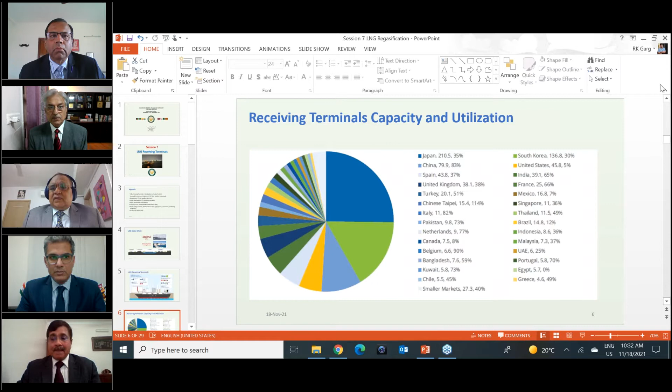Just a minute. I'm not able to see my full screen. Can someone help me? Because I'm still having the cam. There is a cup-shaped icon. If you can press that. Oh yeah, that. Thank you. Thank you very much.

Today's presentation is basically on LNG terminal, and this is very, very important because we SAARC member countries are already importing LNG, and some are planning to import in near future or use LNG in their energy basket. So this session is going to be based on few things. One is that, as Mr. Ehsan has mentioned, it will be considering the land-based terminal, floating storage unit, comparison of these, which one is better, which one is useful, which has good techno-economics, or which one is best in what situation.

And we will also discuss the tolling arrangement or merchant arrangement of these LNG terminals. We will also take into account what are the major factors to be considered before planning for putting an LNG terminal. And we will also discuss the major terms, if you are going for a tolling arrangement, what kind of terms and conditions generally are followed by the regasifier or a terminal owner. And at the end, I will finish with some slides on small scale LNG, but will not take much time on that because there is going to be a presentation by Dr. Nawaz Ahmad. Thank you very much.

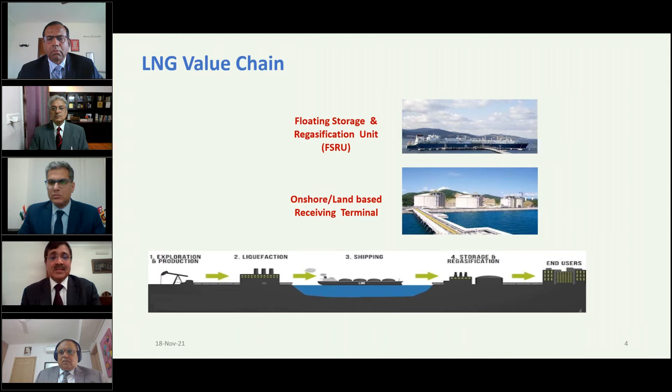This slide is important because all business activity of LNG supply, regasification, and end users is a very important point. The reason is that the entire money which comes from the end users flows back up the chain. So the operation, construction, and utilization of this terminal is very important for every party involved in this chain.

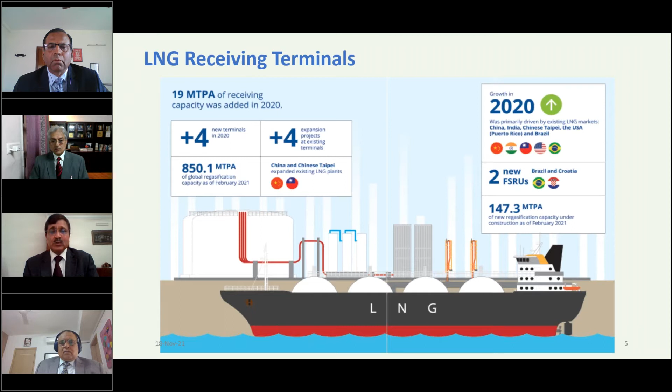You have seen this slide earlier. Currently, globally we have 850 million tons of LNG regas capacity, and around 150 million tons is already under construction. So total we will be having 1,000 million tons of capacity worldwide, and the users and terminal countries are increasing. We heard about more than 42 countries where LNG terminals are already in place.

One important thing to understand, this question was raised earlier also, is what is the optimum utilization rate of a regas terminal. If you see this slide, especially those countries who have been operating LNG terminals for a long time, like Japan, we have 210 million tons of capacity but utilization is only 35%, and South Korea 136 million tons utilizing 30%.

The reason probably is that they have seasonal requirements, especially in winter, their demand increases and they need more gas, plus they need more flexibility in their operation. That's why the utilization of 35% or 30% is there in the terminals in Japan and Korea.

Another important feature: in the United States, out of this total 850 million tons, around 50 million tons of capacity is in the US, which is not under use, only 5% is used. The reason, mentioned clearly yesterday, is that they have now gone to liquefaction instead of regasification, because there is no requirement for regasification in the United States.

Other countries, especially new countries who have come into this LNG regas business, like China, 80 million tons, 83% utilization. India, 39-40 million ton capacity, 65% utilization. Bangladesh is 59%, and similarly in Pakistan it's 73%.

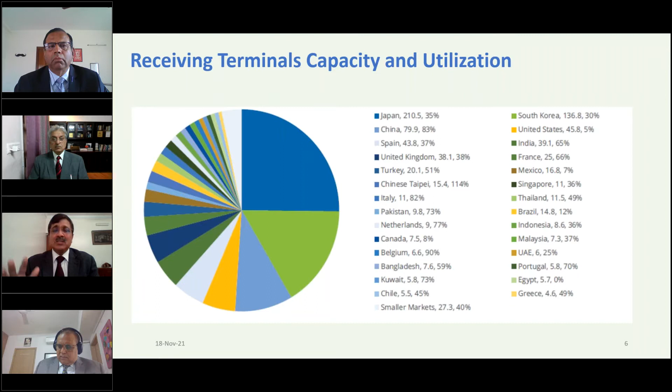The amount required for building a regas terminal is comparatively very low compared to liquefaction facilities. For liquefaction facilities and regas terminals, say if there is $10 billion of investment in a liquefaction facility, the investment you will see here is much lower. But the activities of the regas terminal are still very important.

So before building any regas terminal for any organization or country, some important factors have to be kept in view. First, one has to do a market assessment of the demand for gas and the possibility of its utilization. Along with that assessment, it's very important to look for anchor customers who would be using this LNG terminal. Anchor meaning, is there any power plant?

Is there any fertilizer plant, or maybe refinery, petrochemical complex, or any other major demand center? Because if we have around 40, 50, 60% utilization which is very close, or they are ready to use the gas from the terminal, then life becomes easy. So in any case, a full assessment of the demand is to be made, and then think of going for a regas terminal.

Another important factor is whether I am going to have an onshore land-based terminal or a floating system. Floating means a floating storage and regasification unit, on a floating ship. But there's another system nowadays being seen - an FSU, which is a floating storage unit, with regasification done on land. So all these technologies are quite prevalent now.

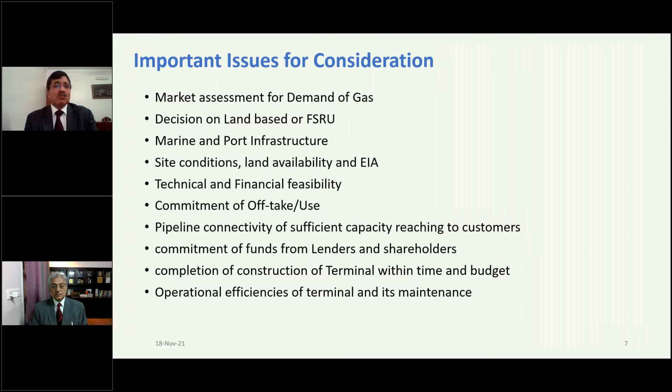This has to continue - training of personnel has to continue along with the construction of the terminal, and regularly the terminal needs to be maintained properly so there are no hiccups during operation. So these are the important factors to be kept in view while deciding to go ahead with construction of an LNG terminal.

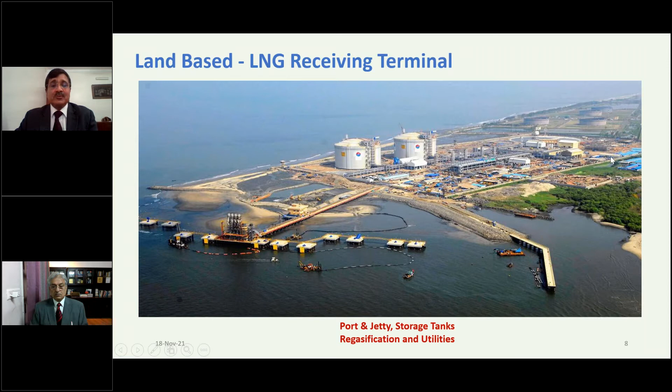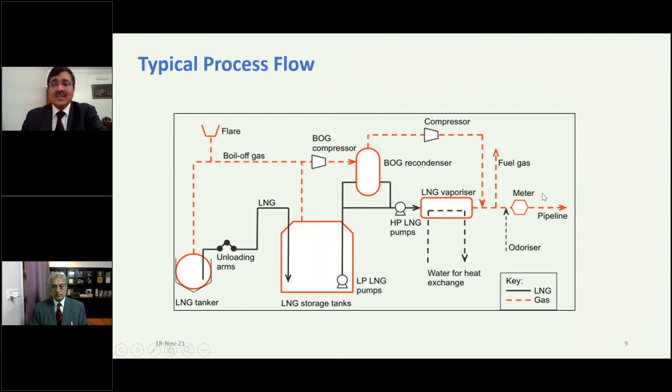Another is FSRU technology, where currently 43 FSRUs at the end of 2020 are in place, having a storage capacity of 6.4 million cubic meters, and FSRUs are increasing day by day, especially in countries where the requirement is immediate and they can't wait more. This is becoming a better and better option nowadays, especially in Bangladesh and Pakistan, where we have FSRU terminals in place.

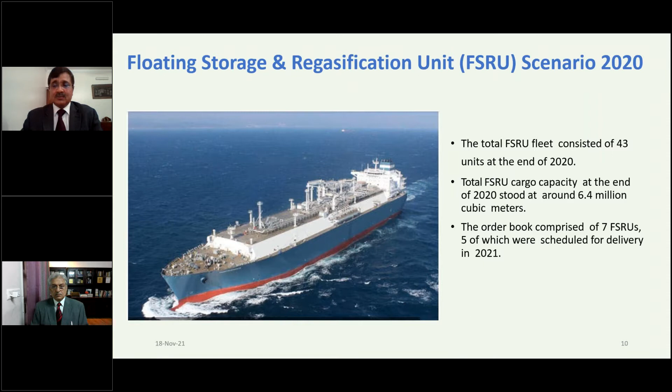Though in India, so far, all of the operating terminals are land-based, there are projects, and one recently commissioned FSRU project is also there as of now. So we'll discuss in detail what the FSRU components are. If you see one typical FSRU connected to the shore, the same kind of facility is required for the ship to be in place, but this is an FSRU. This is a floating unit, a floating FSRU unit.

You will see the regasification plant is stationed on the FSRU. The storage tank is basically a ship. The unloading hose is there. When a ship comes, it is connected to the ship and LNG is unloaded. Virtually it is a ship to ship transfer happening, and then from there the gas is exported to the consumer. So actually there is no activity on the land except the pipeline connectivity, plus the onshore marine side facilities are created.

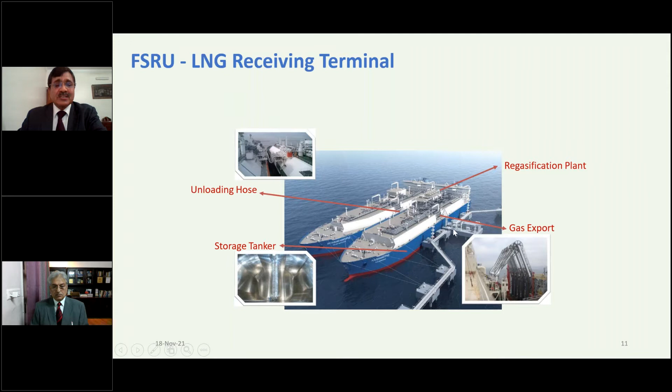There are projects where the FSRU is not onshore, but somewhere in the sea, maybe 10 kilometers, 15 kilometers away. And there are technologies available where the FSRU is stationed in the sea, and an underground natural gas pipeline transmits the gas to the land. Both technologies are present, but it depends upon the marine condition, whether it is feasible to put the FSRU there or onshore. So both are relevant nowadays.

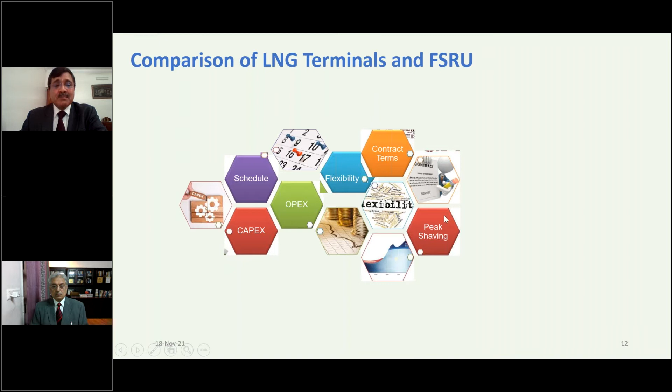A few things have to be considered while going for an FSRU or a land-based terminal: what is the schedule of when I need CAPEX, how much CAPEX is required, whether I need a low CAPEX activity, how much OPEX there would be in case of an FSRU and a land-based terminal, what flexibility I need, whether it is a peak shaving terminal. These important factors we will discuss.

This is a slide I have taken from the web. It is from a study done by one of the companies, comparing a 3 million ton land-based facility and an FSRU. For the land-based, the indicative cost for a jetty including pipeline comes to around $60 million. It was considered the same, because a ship has to take berth in both.

An unloading line here is required for an LNG terminal. For a tank, it is around 85 million. They have considered only one tank for a 3 million ton facility. If it is more, then you probably need 2 tanks of that capacity.

In FSRU, because the tank is on the ship, there is no investment required. FSRU vessel cost has been considered around $250 million; it is a new FSRU. The terminal owner has an option: instead of putting in that cost, they can hire the FSRU, and the FSRU owner can provide the services for a fee. All other process equipment, as I mentioned, is required to be placed on the LNG terminal.

For onshore infrastructure, a minimum expenditure considered for that facility or site is around 30 million, and other charges are like this. So comparatively, it was indicated that around $560 million versus $360 million is the capex required for a 3 million ton facility, land-based versus FSRU. The numbers could be different, but one thing is sure: the cost of an FSRU is lower compared to a land-based LNG terminal. We will see which is good and which is not.

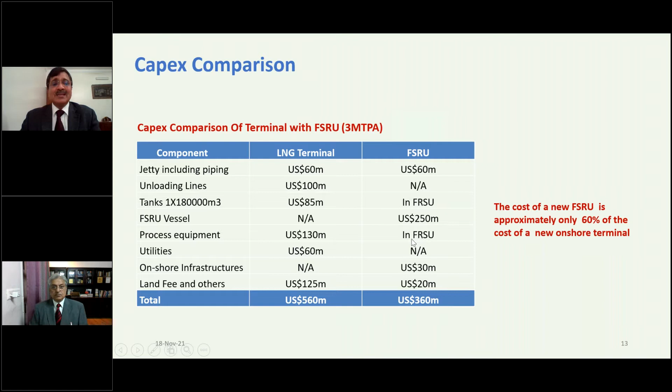Time taken for an FSRU and a land-based terminal is an important factor. A land-based terminal takes longer, around 36 months after award of an EPC contract, because the LNG tank construction itself takes 36 months, and other activities can be done alongside. So 36 to 40 months is required for an LNG terminal after the decision is taken and the award has happened.

An FSRU takes around 27 to 36 months, depending on whether you are getting the ship built or hiring, how many facilities need to be created on site, and what conditions need to be in place on the FSRU. So the time for the terminal to be ready is less in the case of an FSRU.

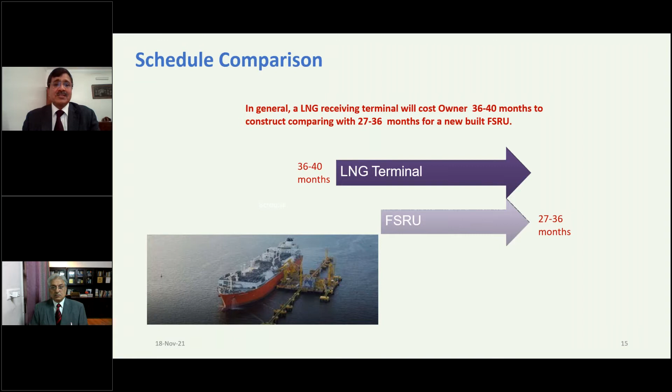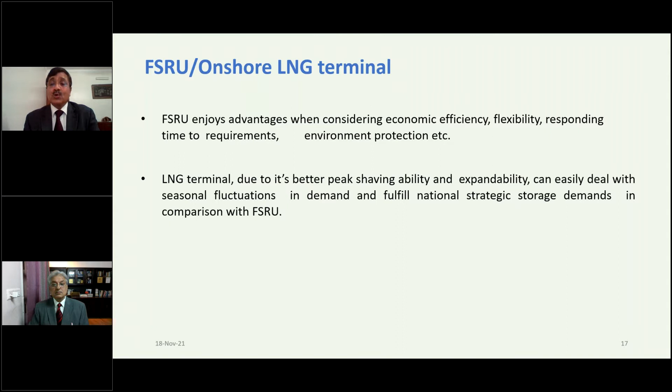So FSRU enjoys advantages considering economic efficiency, flexibility, response time to the requirement and environmental protection, whereas the land-based terminal, due to its better peak shaving ability and expandability, can easily deal with seasonal fluctuation in demand and fulfill national strategic storage demand in comparison to FSRU. So these are the basic differences between the two. Both are technologically working, but the decision has to be taken on which one is good for a particular site and the conditions prevailing at that time.

Another important thing one has to decide when building a regas terminal is whether it is going to be a project company building the LNG terminal that will own the gas and sell gas. It is a merchant structure, where the project company that owns the LNG regas facility directly enters into an agreement with the LNG supplier. They have the LNG SPA and the shipping arrangement, or shipping is done by the LNG supplier. So it is a direct agreement with the project company, who buys LNG and then sells gas to the gas off-taker, whether one off-taker or multiple off-takers or consumers. It depends upon the model which has been created.

So all the risk with respect to LNG volume, LNG price and related matters remains with the gas company, because they own the LNG and supply gas. Though this company would like to sign materially back-to-back agreements with the gas off-takers if they are aggregators, and try to insulate itself as far as possible from LNG price, LNG volume and foreign exchange. So this depends upon what kind of financial model is done.

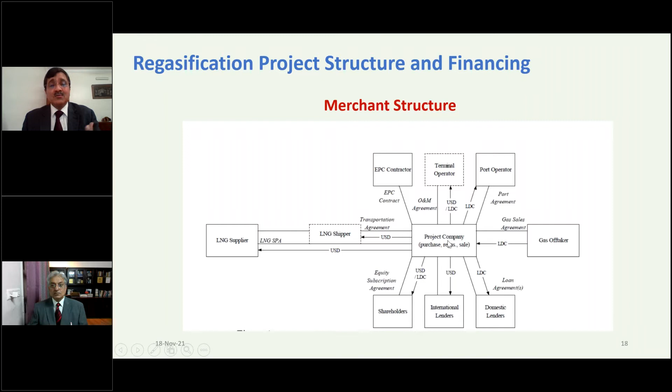Another model is a tolling structure. Under the tolling structure, the responsibility of buying LNG and taking gas basically remains in between. It may be a gas utility company, or it may be off-takers who would be users of the LNG facility. It could be one, or there can be multiple.

So they take a call with the LNG supplier and shipper to buy LNG and get it transported, and they're the gas off-taker then, who will off-take this gas from that LNG, this utility company or aggregators. And they will sign a tolling agreement with the project company who owns the terminal, and the rest of the other activity would be carried out with the terminal owner, and they get their financing done based on that. So construction and operating risk related to the terminal remains with them, whereas in the tolling structure, the LNG-related activity and supply-related foreign exchange remains with the other entity who takes this.

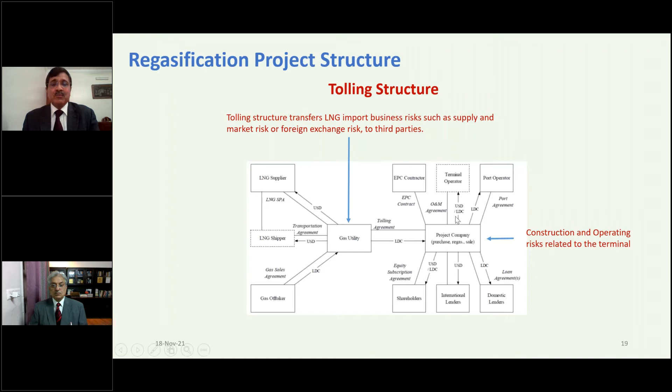Both structures are in place. So one can decide which model is good depending upon the risk appetite of that company, or the requirement of especially the off-takers. Or it could be a hybrid model, as I mentioned about Hazira, where both models are working right now together along with the terminal. So it has its own challenges, and another risk involved in that.

So in the terminal use agreement, especially in the tolling structure, the basic services provided by the toller are berthing of the LNG ship, unloading and receipt of LNG from the LNG vessel, and storing that inventory on their behalf in their terminal, because ownership of the inventory remains with the owner of the LNG, who is a utility or an off-taker or user of their facility. And they provide the pumping, regas and send-out facility. Basically, this is the major activity carried out by them, and transportation to the delivery point. Sometimes it is very close, sometimes far from the terminal, depending upon what kind of transportation facility is created for gas. Measurement and testing facility is provided, plus maintaining the inventory on their behalf and providing that information. These are the major activities for the tolling company to do on behalf of others.

So in the receipt of LNG, as mentioned, the title, custody and risk of loss: title always remains with the owner of that LNG. Custody is with the toller, and the risk of loss depends upon the agreement you have signed. If the risk of loss is with the tolling company, then they have to take care of the insurance, because the LNG inventory is in their custody, so the risk remains with them. Another activity is that when the LNG is unloaded, they will do the measurement at the terminal. They have all the equipment for it, because the payment to the LNG supplier in case of DES supply is based on the quality and measurement done at the terminal, and the terminal should have that kind of facility to do that service.

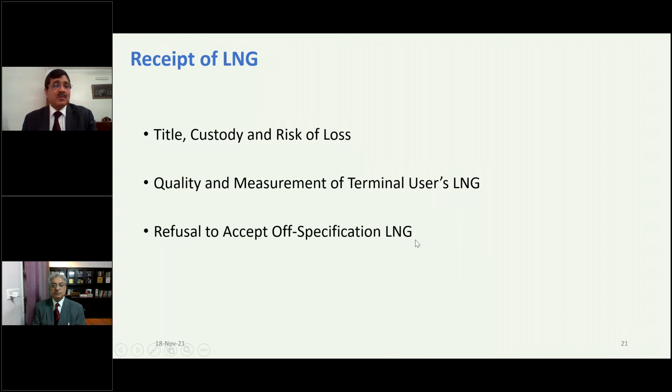They will also have an agreement in place that in case the LNG which is unloaded, or likely to be unloaded, does not meet its specification, what the conditions would be, whether they will refuse it or accept it. If they accept it, whether they will make good that specification, whether it is feasible, and if there is a cost, how it is to be shared. These are some of the operating conditions, because generally in an LNG terminal you have one or two storage tanks, and if the users are multiple, you can't have a separate storage tank for each. So the LNG is commingled with the other LNG that comes into the terminal. There are no separate storage tanks provided.

So in the tolling agreement, detailed provisions are entered into with respect to failure of a party to provide LNG, or failure of the toller to deliver regasified LNG at the required send-out rate, and in that situation what kind of penalties and mitigation measures are provided. Another activity is scheduling, done on a regular basis, because once the LNG cargo is unloaded, it determines how many days are required for the send-out to complete evacuation from the terminal. It is not that once the LNG has come to the terminal, it will remain there for a long time. The terminal owner and the owner of the LNG agree that it has to be evacuated within a period of 7, 10 or 15 days, depending on the flexibility available with the terminal and the requirements of the market.

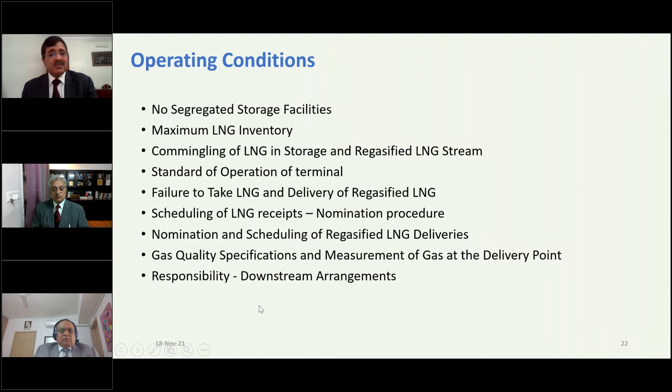The nomination and scheduling is done. So downstream arrangement responsibility remains with the user of the LNG terminal and all pipeline related activity that they do. On the shipping side also, these are the major activities, and it has to be properly captured in the tolling agreement about how the ship is going to be compatible with the LNG terminal, how the compatibility is to be ensured, and what are the requirements to be met for that.

There are generally terminal rules that have to be followed by any ship when it comes to the LNG terminal. So vessel berthing requirement, and this is also one of the major costs. Actually, the port dues and charges, if it is owned by the terminal owner, then it is a cost to them and they charge accordingly in the regasification charge. If it is a separate port, then this port charge is paid to the port owner or port operator, whosoever it is.

This is a major thing that is discussed. What is going to be a tolling fee or terminal fee? Generally, the system of charging tolling fee: one is a capacity fee, which is paid irrespective of its usage. Capacity fee is, once you book a capacity of 1 million ton, then you pay the fixed charges of capacity fee, and the rest, usage fee, depends upon how much you use, and accordingly charges are fixed. In certain cases, it could be one bundled charge also, and mechanisms are built depending upon how much utilization is allowed, 80% or 90% or 100%.

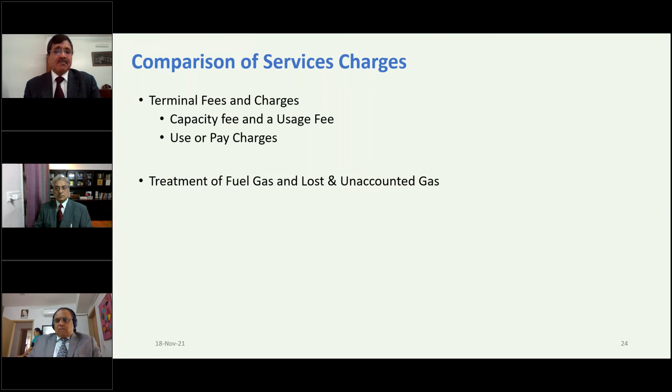And yesterday there was a question about how much the regas charge generally is from the LNG terminal. I think it depends from terminal to terminal and the cost related to the terminal, how much flexibility you are looking for your inventory to be kept at the terminal, different kinds of charges, plus the utilization of a terminal. So generally it is closer to $1 for a new terminal, but we have seen that terminals which have been operating and have larger capacity even charge around 50, 60, 70, 80 cents, which includes all the charges, including port related charges. So this is generally the charge, but it depends upon the terminal.

Another important point of discussion in tolling is that a certain amount of gas is used during regasification when it is unloaded, and a certain amount of gas remains unaccounted. There's a flare in the facility; gas is never just flared, but it is a requirement of the LNG terminal that some amount of gas needs to be flared. So when the toller is bringing LNG, for system use gas, we say SUG, or boil-off gas, whether it is to be paid by the owner of LNG to the terminal or it is a part of the regasification charge. If it is to be paid separately, then a certain percentage is agreed in advance, and maybe a reconciliation method is worked out, or it could be a standard charge which remains throughout the contract.

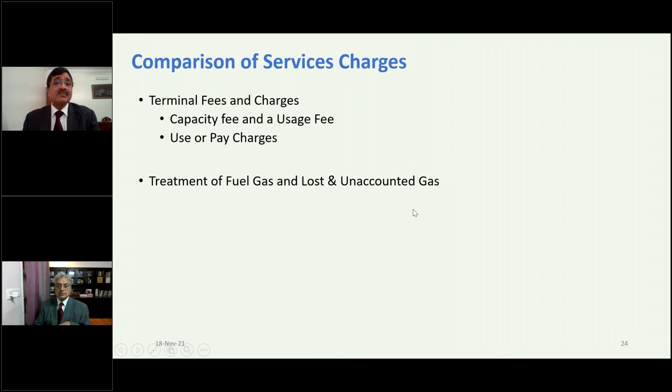Rest of the clauses are more or less the same as you saw yesterday in the GSPA: invoicing, tax provision, insurance and liabilities, and force majeure.

I will take only 5 minutes here. I will not take much time, because you will be having another session from Dr. Nawaz Ahmad. So generally in small scale, the definition is where the capacity is less than 1 million ton and vessel size is less than 60,000 cubic meters. But we are seeing regas capacities much lower than these numbers.

So generally the concept is there are 3 kinds of small scale, or virtual pipeline, or whatever we call it. One is when there is no pipeline connectivity, or the pipeline connectivity is very costly and it is difficult to build that pipeline, then small scale could be an option for building a small regas facility there. Another is for stranded gas. You have the field, but only a small amount of gas is there, and you can't transport it through pipeline.

Then you put a liquefaction facility, and through a virtual pipeline route, you transport that gas through trucks and other facilities. Third, LNG is also transported through barges in small quantities to different locations, especially when there is a requirement of bulk break operation. Then small ships are used for this facility to take it away.

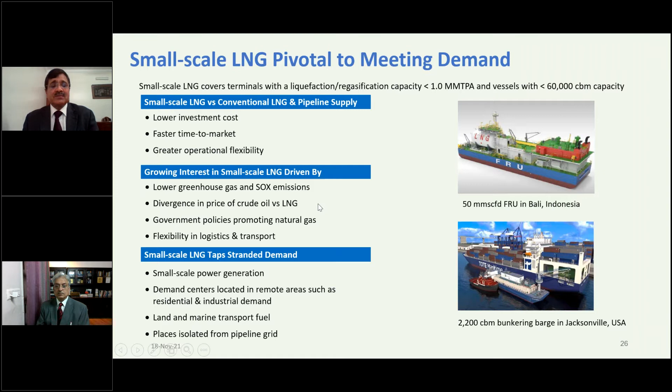Another operation for small scale LNG is for LNG use in transport, directly as a liquid fuel. So there are various uses, and interest is getting generated. If it is doable and feasible...

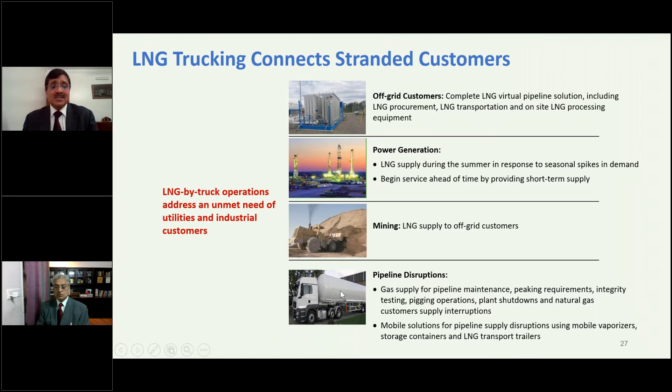Nowadays we are seeing that a lot of demand is getting generated for small scale LNG, as I mentioned, for off-grid customers, small power generators, mining operations where dumpers and these kind of equipments operate on LNG, and also when there is a pipeline disruption, supply could be continued for that purpose. So ultimately, one has to see how much is the demand, what is the distance to be covered, whether it is 500 kilometers, 1000 kilometers, or 2000 kilometers.

One has to take a view on how much is the cost of covering that distance and carrying that LNG, because that is going to be the major cost. Then a small facility is created, what is the cost incurred and how much manpower is needed. So overall, I think the cost of implementing has to be considered while deciding on the small scale facility.

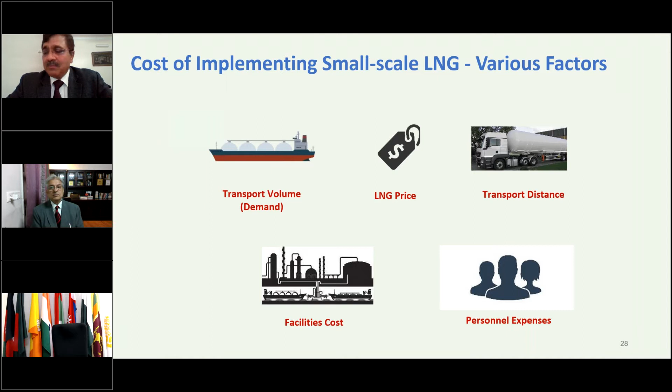Thank you very much. I'll stop here, and I will be very happy to take any questions from the audience. Thank you very much.

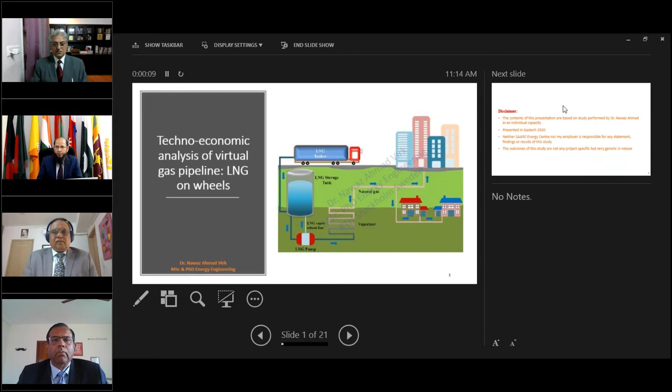Thank you very much for the brief introduction, and assalamu alaikum, and good morning everyone. Today I'm going to present one of my studies on virtual gas pipeline. The talk will cover techno-economic analysis of LNG virtual pipeline. This study was prepared by myself and presented at Gastech 2020 last year.

Before I start my presentation, there is an important disclaimer. I want to declare that this presentation is based on my personal study, which was presented at Gastech 2020, and the contents of the study carry no responsibility on either SAARC Energy Centre or my employer. The outcome of this study is not project specific, but very generic in nature for the purpose of conducting this study only.

My presentation will contain a brief introduction of virtual versus actual pipeline. Then I will talk about my study results. First, I will speak about base case modeling, then sensitivity analysis, and in the sensitivity analysis I will speak about diesel versus LNG powered truck fleet.

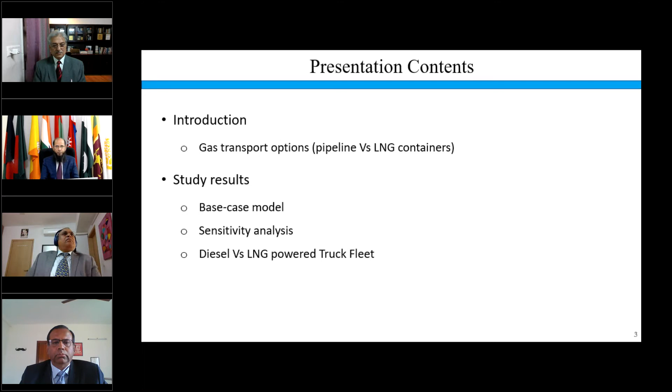Conventional pipeline transportation of gas from LNG port terminal to the consumer requires a physical pipeline, which is capital intensive. LNG is regasified at the terminal and gas is supplied to the consumer through a pipeline network. It is relatively non-scalable and limited to gas consumers en route only.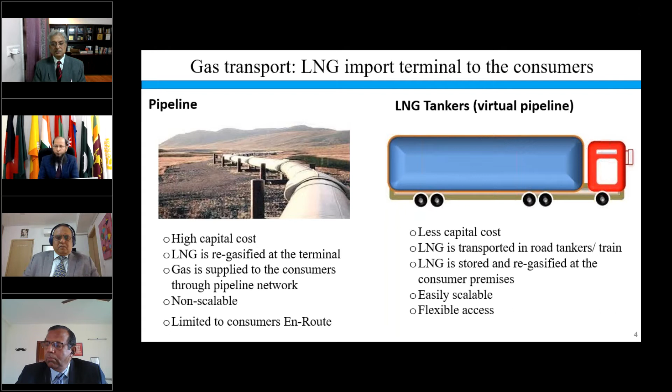Whereas LNG tankers, which represent a virtual pipeline, are less capital intensive. LNG is transported in road tankers, or it can be transported through train. LNG is stored and regasified at the consumer premises. It is easily scalable and relatively flexible compared to pipeline access.

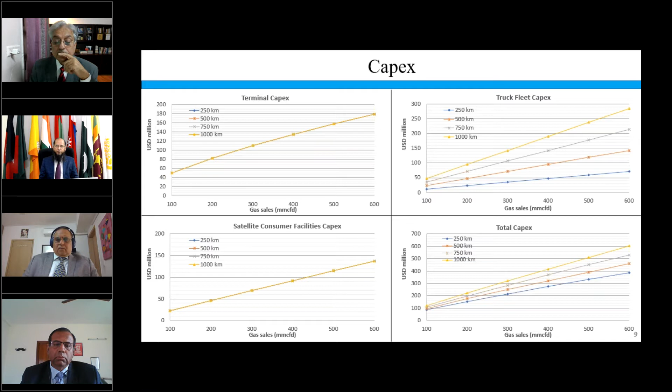Similarly, for the truck fleet, higher volumes we need to deliver and longer distances require more capex on that fleet. Here is the satellite consumer facilities capex - with increase in volume this also increases, but it is not dependent on distance. Combining all these main capex requirements, we see how the total capex increases.

How many trucks do we need to deliver a certain amount of gas at a given distance? With increase in gas delivery as well as distance, we need a larger number of trucks. If we want to deliver 600 mmCFD at a distance of 1,000 kilometers, we need about 2,700 trucks. If we deliver at 250 kilometers instead, the truck numbers reduce to about 700. How many trucks we need to load per day depends on how much gas we want to deliver, so it is not distance dependent.

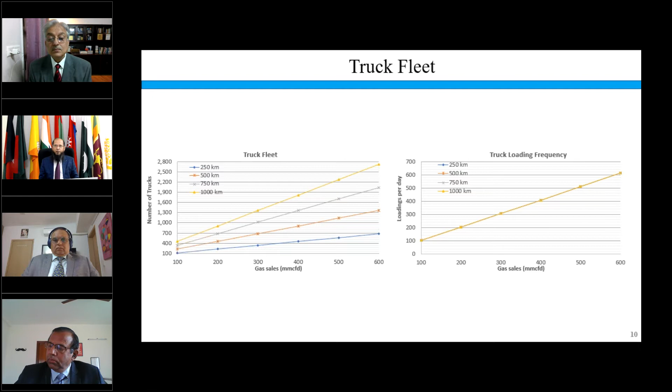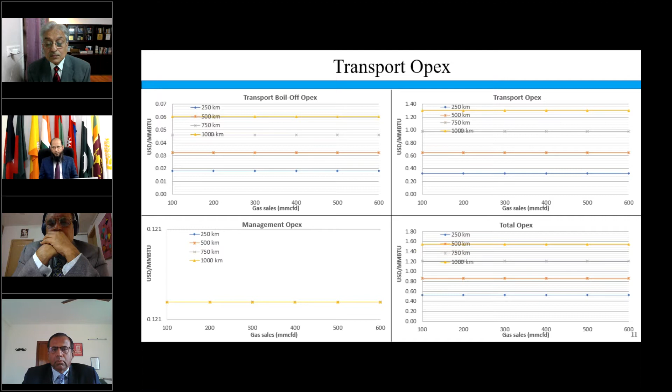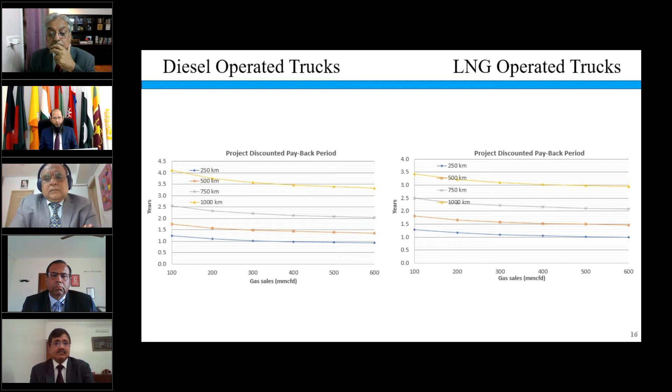Based on the cost of the diesel trucks versus the LNG operated trucks, running cost, including the diesel price versus LNG price and other costs, we see that the economics of operating LNG trucks is relatively better than operating the diesel trucks. So there is incentive to shift your truck fleet from diesel operated engines towards LNG operated engines.

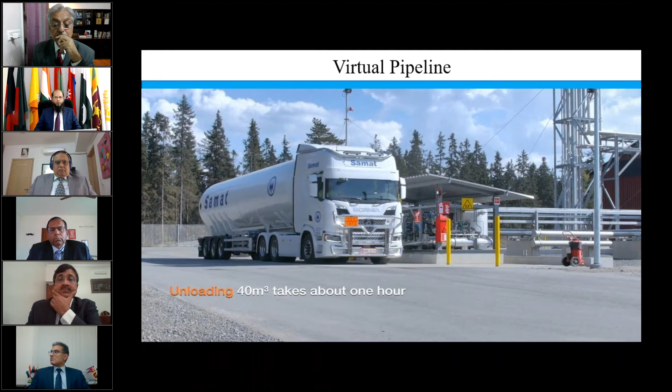Basically, answering this question directly is relatively tough. The market is developed, let's say in Sweden, by a few truck engine manufacturers. It is not conversion of the diesel engine, but they are developing the LNG fired engine directly. Conversion is also taking place, but the exact conversion cost I can't tell at the moment. Yes, sir. Maybe Mathur sir wanted to add something.

Yeah, please. So in India, our experience is that an LNG truck costs about 10 lakh Indian rupees more than a diesel truck. And of course, you can convert a diesel engine into LNG. You can also use a diesel engine fired by CNG. You start off with diesel and then you inject CNG, run 80% of the time on CNG, and then go back to diesel while starting and while switching off. So all that is possible, but 10 lakh Indian rupees more is what is spent in capex.

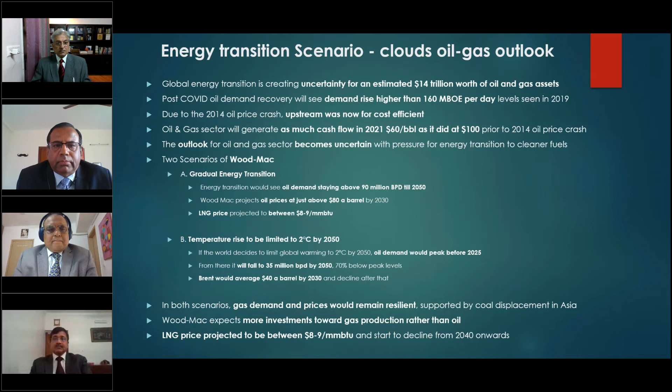Again I'm stuck. Next. I think. Sir, you have to click on your presentation instead of the software. Okay, now I think it's moving.

Yes. So my point is that whichever the case may be, going forward, we will need a lot of gas infrastructure to be put in place, because we've seen in the past that unless you link the production of gas with the markets, the opportunity of utilizing gas gets lost. And therefore, you need that piece of pipeline in between an LNG terminal and the final market.

And also, as we've seen in the past, we need liquefaction facilities, we need shipping, we need regas facilities, whether they are in the form of FSRUs or land-based terminals. And then once you have those regas facilities in place, you actually need pipelines to transport that gas and deliver it to the end customers. And therefore, I mean, you all are experts.

I will not dwell too much into details of these things, but these pipelines are essentially steel pipelines, which are high pressure pipelines. They are interstate or continental pipelines. In certain cases, they cross national boundaries also. And they are generally required to be constructed over long distances to take the gas to the end customers. So when you construct a pipeline, you need a right of way, maybe something like a 50-foot right of way, and you need about 1.5 or 2 meters depth underground for these pipelines to be laid.

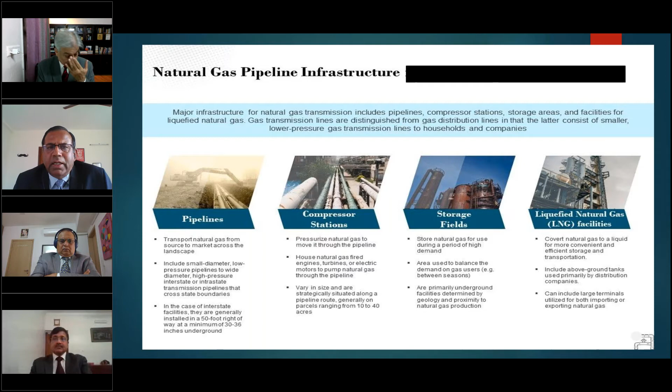There are two kinds of storages. One is the pipeline itself acts as a storage. So the more the pressurizing of the pipeline, the more the amount of volume that you can store within the pipeline. The other is the storage fields for balancing purposes. Then, of course, you have the option of getting the gas either from a LNG liquefaction facility, which also forms part of the pipeline infrastructure, or you have domestic fields which feed into this, and then to supplement that, there are storage fields. So all this entails the entire pipeline infrastructure which has to be set up in any nation to ensure the requirements or demand of gas are met.

Now, quickly coming to, I have just one illustration about India, where, over a period of time, we realized that our domestic sources are not enough to meet the domestic requirements. So we started early and we decided around the year 98, 99 that we need to import gas, because we were able to meet 100% of our domestic gas demand till the year 2000 or so. But we realized very soon that this gas is going to fall short, and we will need import of gas either through pipeline mechanism from other countries or through LNG mode.

So at that point of time, this Petronet LNG company was created, and they set up the first terminal at a place called Dahej in Gujarat. Since then, several new terminals have come up in India, and at last count, there were about 8 or 9 terminals in operation. The largest one, of course, is at Dahej, which has a capacity of around 17.5 million tons. And as Mr. Garg put it, capacity is being expanded to over 20 million tons going forward.

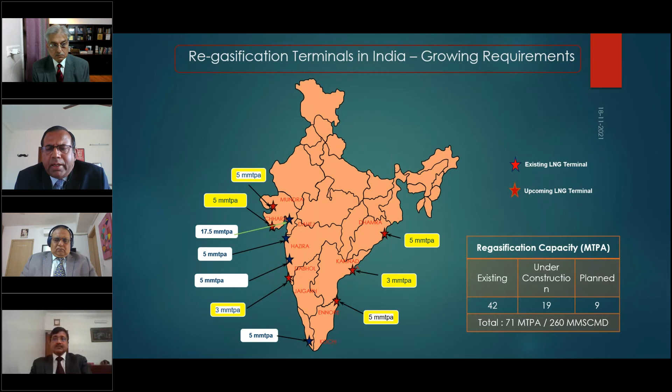And as was put in the morning, we already have one FSRU also in operation. There are 2 or 3 others which are being discussed and in a planning stage as of now. And depending on the requirements, more facilities will be set up. And all these facilities essentially will get connected to the infrastructure that is getting created in terms of the pipelines that are being laid.

Quickly coming to pipeline construction, I will not take long because all of you gentlemen know about pipeline construction. Pipeline construction is one of the most complex things, although it looks very simple, but since it is a longitudinal kind of a construction activity, it requires acquiring a lot of land. And if the project is not conceived and planned ahead in time, then it can lead to delays, cost escalations, and various other associated problems, including environmental issues.

So a lot of planning and scheduling and budgeting is required to be done much ahead of time, and the right kind of technology, the right kind of designing and other things, and execution partners are required to be in place to ensure that the gas pipelines get constructed properly and they get connected to the supply sources as well as the demand centers well in time and in synchronization with either the import facility which is happening or the new gas that is coming in from domestic sources and the markets which are getting developed.

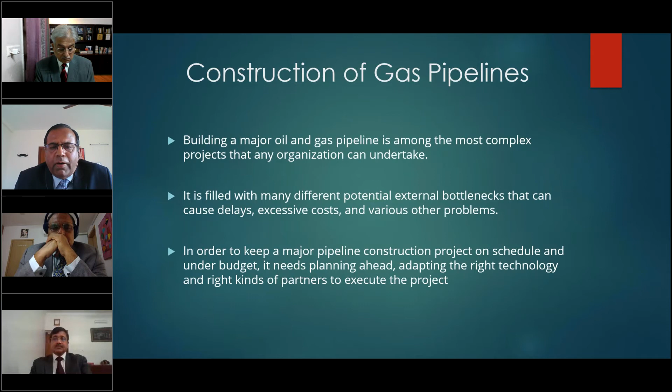So in India, we are actually at a stage where a lot of new domestic distribution networks are getting created. A lot of new fertilizer plants and refineries and other petrochemical plants are coming up. So scheduling of these pipelines to ensure that they get connected in synchronization with the upcoming of these projects is essential. So a lot of thought has to go in to ensure that these projects are implemented well in time.

We all know that pipelines require to be laid over different geographical areas, so the terrains can be difficult. Although the best thing about a pipeline is that it is very cost effective as far as transportation costs are concerned. So while we talked about 65 cents to 85 cents in the earlier presentation on transporting LNG over longer distances, a pipeline, if it is efficiently implemented, could deliver over a couple of 100 kilometers in less than 50 cents transmission cost. So it is an efficient way of transporting gas.

It requires very low energy, if it is designed properly, and it ensures steady and constant supply of gas over longer distances, over long periods of time, 25, 30 years or thereabouts. But there are challenges which are to be overcome when you need to construct or lay a new pipeline. Even when you need to augment the capacity of a pipeline, there are issues relating to environment. There are issues relating to land acquisition. There are issues relating to right of way.

At times, we are required to lay a different pipeline with a different product in the same right of way that we have laid an existing pipeline. And there are instances in India where, because of the non-availability of land, or because of people not willing to part with the land for these kind of activities, the same right of way has been used, that 30-40 meters that is available, to lay an LPG pipeline, to lay a product pipeline, and also to lay a gas pipeline, over maybe a 3 or 4 meter spread differential kind of a thing.

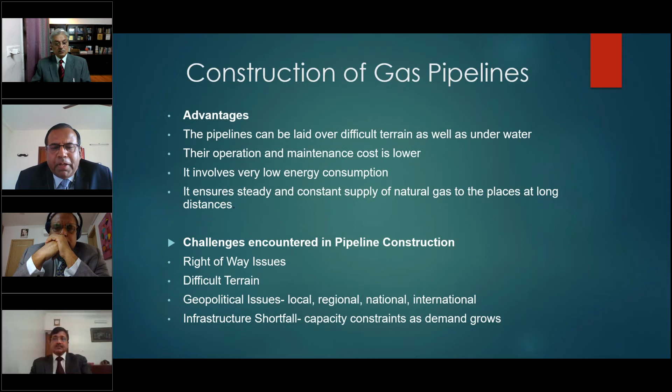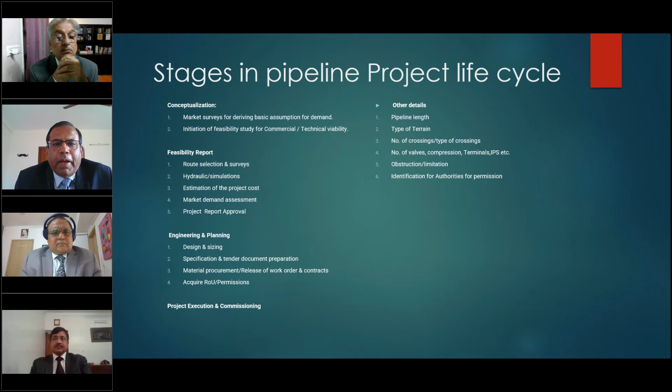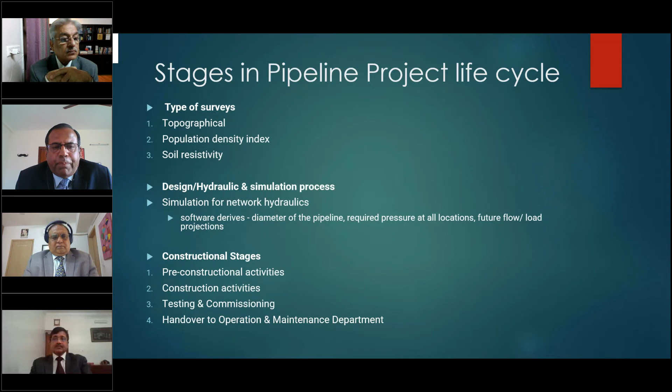I will not dwell into what is the project life cycle of pipelines. We all know, and you can read it at leisure later on. But it's quite a complex exercise that one has to undertake to ensure that all activities are well planned and executed to ensure that a pipeline comes into place. And then there are stages of pre-designing, there are stages of pre-construction, then there are activities which relate to construction, testing, commissioning, and handing over and operation of these pipelines. And each one is a complex thing, and I'm sure all of us know what it requires.

And then, of course, these are some details about pre-construction and construction process and activities. So you have to do a lot of resource and equipment planning. You have to do a lot of scheduling, and then you have to do a lot of mobilizing of manpower and equipment. Today, we are running short of people who can actually implement on the ground these kind of activities.

There are big entities which are engaged in construction of pipelines and other things, but availability of adequate manpower who are trained and adequate equipment which is available in time also requires a lot of pre-planning activity to be done. Then after all these things are there, then you have to pre-qualify. A lot of things like welding, etc. of a pipeline require specialized people with specialized training and procedural approvals, etc.

So all this requires, and then at the end of it all, the training on safety, because these are things which have a safety issue as far as the product is concerned. Not only that, while constructing also a lot of safety training is required to ensure there is no mishap while the pipeline gets laid.

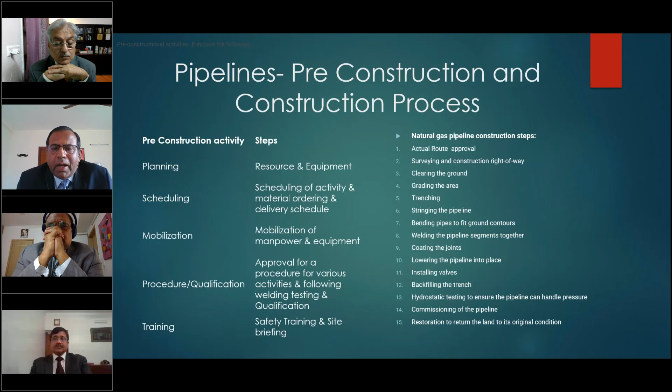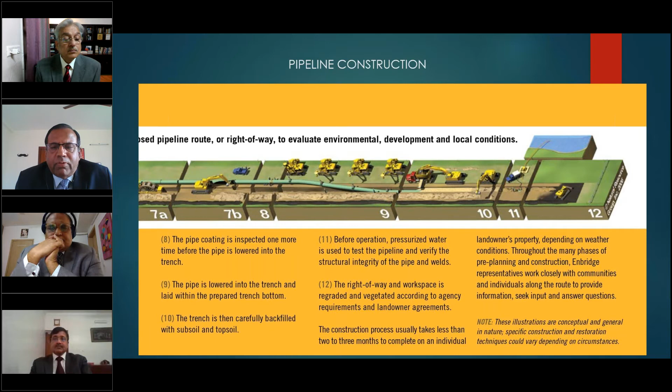And then you restore the land and give it back to the farmer or whosoever has given the land for the pipeline. I'll skip all these slides, but you can read them at leisure. They just talk about how difficult it is for a pipeline infrastructure to be laid and what the process involves. These are some pictorials of how a pipeline construction activity is happening.

So next, coming quickly to what are the safety norms and regulation. We know ASME codes are required for designing material, equipment, welding, fabrication, commissioning, etc. These are the standards which are followed. And then in India, we have something called T4S regulations. And these T4S regulations are technical standards and specifications for safety standards,

as to what kind of a material you will use, what kind of equipment you will use for construction of a pipeline, what kind of welding standards are required, what kind of qualification of a welder is required, what kind of pipeline system components and how they need to be fabricated, and the procedure required to ensure that robust safety norms are adhered to. It also talks about designing, installing, testing, operation, maintenance procedures. So all that has to be rigorously followed, and I'm sure every other country also has these kind of regulations in place.

It also talks about things like corrosion, because if gas is not treated properly, and if you have sulfur or H2S or any of those corrosive things, and also the soil has a lot of corrosive elements in it. So we have to ensure that a pipeline, once it is laid, is protected and integrity of the pipeline is maintained over long times, maybe 30, 40 years. And for that integrity to be ensured, a lot of activities are required to be done.

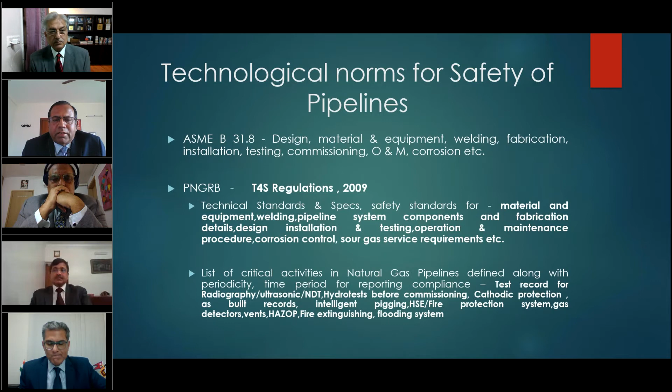And in Indian standards, it also defines the periodicity at which different critical activities are to be performed. It talks about reporting of various compliances that are to be done, periodicity of reporting, whether it is annually or half yearly or biannual or whatever. And test records are required to be maintained for various things like radiography, ultrasonic tests, hydrostatic tests, cathodic protection, to ensure pipeline protection is adequate and integrity is maintained, and all kinds of other things, including leak detectors, flooding systems. All those things are required.

And if you are looking at operation of pipelines, these are now all done remotely, and I'm sure they must be done remotely in other countries too. So there is an operating control room, and these control rooms are linked to remote terminal units, and these remote terminal units collect real-time information and convey it through satellite and microwave links, or through cellular phones or any other communication mechanism to the central control room, which ensures that the pipelines are run flawlessly.

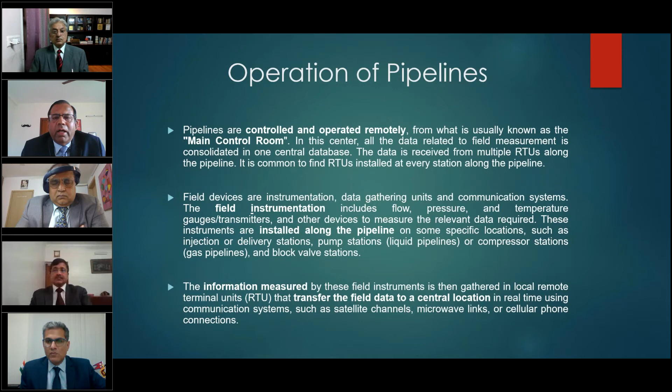So there are field instrumentations in place. These instrumentations, on a dynamic basis, gather data about the kind of flow which is happening, the pressure, the temperature, and all other things, at every distance they are put. And all these data are then controlled and maintained to ensure the integrity of the pipeline system, and the flow is happening, and the hydraulic conditions, the pressures, etc., are maintained properly.

And then there is a supervisory control and data acquisition system. These are softwares and applications which allow access to various things, like if there is a leak which is happening over maybe 100, 200, 300 kilometers. So the drop in pressure will predict whether a leak is happening or likely to happen.

For a product pipeline, it will talk about how the batch is moving and where, when they can push another liquid or product. It also talks about if you put in a pig, where the pig is, and how. The pig also gives you sensing and gives you all the data of whether the thickness of a pipeline is proper, or whether there is a pitting, or there is an issue relating to some water which is contained within the pipeline, things like that, or some corrosion which is happening.

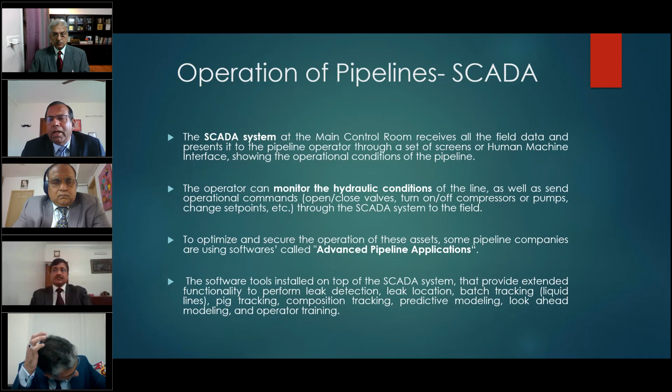And then it also does predictive modeling, looking ahead as to predictive maintenance if it is required, or if it requires some kind of operational philosophy to be changed. So all these software systems allow all this to ensure a pipeline operates flawlessly over 20, 30 years.

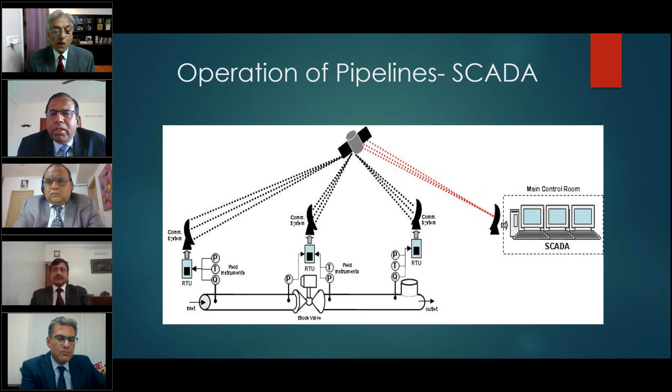Of course, this is a depictive diagram which shows how over longer distances the signals are tracked by the RTU from the tracking equipment that is installed, and through satellite or whatever mechanism it is sent to the main control room, where the entire operation of a pipeline is managed.

Coming quickly to common carriers and contract carriers. A contract carrier is a contract between a shipper and a transportation service provider, an entity which owns and operates a pipeline, provides capacity to any shipper.

Now, in certain cases, the transporter himself may be the owner of the commodity and is utilizing the pipeline directly, or the entire capacity of the pipeline himself. In other cases, or by regulation in countries like India or elsewhere, some capacity of the pipeline is required to be either contract carried, or common carrier capacity is allowed to be given to third parties.

So a contract carrier is one where, beyond your own requirements, you give some amount of capacity on a contract for transporting or shipping volumes of gas from point X, which can be an import terminal, to a market or an exit point. And those capacities are booked for periods not less than 1 year. That is in the Indian context. In other countries, the regulation may allow for a longer period or a lesser period.

So if you want to transport or ship X BTUs of gas, then you have to define from where the gas is required to be picked up or shipped, and what is the exit point. And then you have to define at what point of time the capacity, the volumes would be available, and then at what point of time it has to be delivered. So that is a contract which is a gas transportation agreement or transmission agreement, which is signed between two parties. This is for a period not less than a year, and the shipper is obligated to deliver the volumes at the inlet point of the pipeline system.

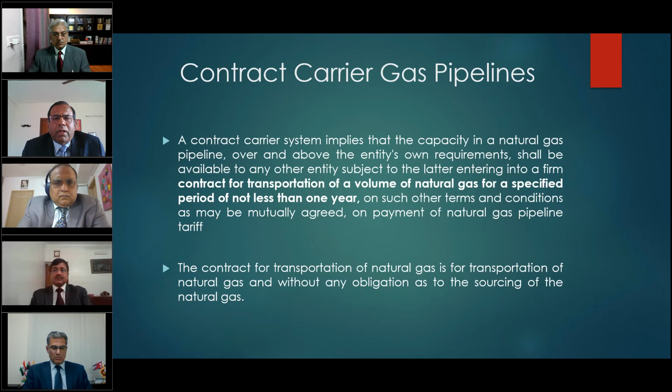Now, natural gas pipelines are natural monopolies, we all know about that. And these monopolies are therefore required to be regulated, because in case of other products, you may have alternate mechanisms in place or alternate transportation methods available, or parallel competitive mechanisms which are available for delivering a product. But in case of a natural gas pipeline, once it is laid, duplication of those pipelines with a competitor does not nearly happen unless that pipeline system gets saturated. So therefore, the concept of natural monopoly is there.

Because it's not easily replicable by a competitor or rival or third party who can give you the same service from the same point to the same discharge point, consumer interest must be protected in order to promote competition. Regulations come into play, and people must ensure they abide by those regulations, allowing access to capacities on a non-discriminatory basis for any shipper to utilize. These things will be dealt with in the regulatory session coming up soon.

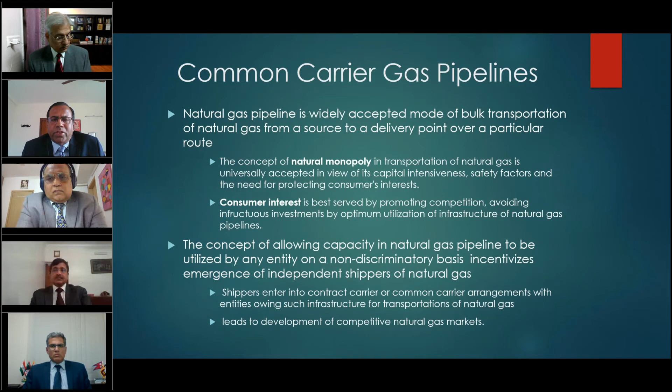Non-discriminatory access of pipeline systems is allowed. I will not go into details, and you can go through these slides later on.

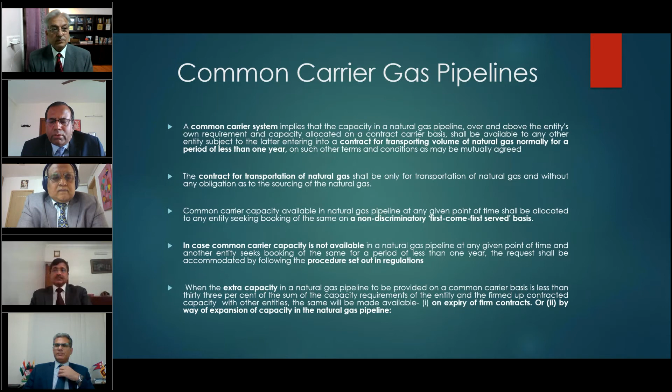Coming quickly to transportation contracts, which we discussed yesterday - these are contracts where both parties have rights and obligations. There are certain conditions precedent, and an operating code which the regulator, government, or the entity operating the pipeline defines, covering how several shippers putting in their gas will behave, how the transporter will behave, and at the redelivery point, if there are different shippers, in which manner and what proportion it will happen. It's all defined, including the pressure at which it is to be redelivered.

Then we talked about capacity tranche - these are tranches available in a pipeline system on a dynamic basis. Transporters are required to display the total capacity of gas that can be shipped from point A to point B, what is the pressure, and what quality of gas or other parameters are required at the entry point for gas to be allowed to enter the system.

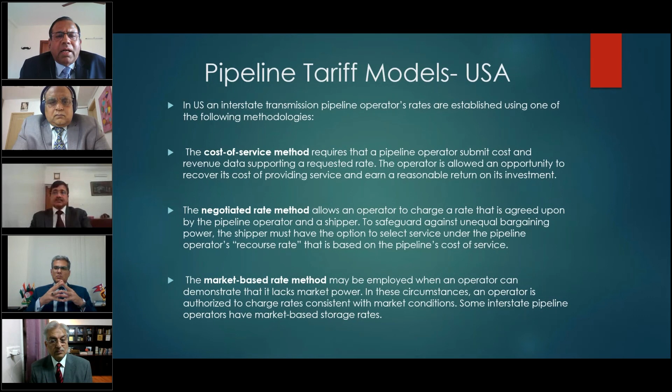In the US also there are several mechanisms: cost of service mechanism, negotiated rate mechanism, and a market-based mechanism which two parties can negotiate between themselves for delivery and redelivery of gas. So these are mechanisms which are prevalent across the world.

Just to give you an illustration of one pipeline tariff in India, there is one pipeline going from east coast to west coast. It is known as the east-west pipeline, over 1,000 kilometers long, and it has been divided into 4 or 5 tariff zones. For each zone there is a different tariff. I mean, these are illustrative numbers.

For example, for zone 1, which is the first 200 kilometers, the tariff is just 20 cents or thereabouts. Then in zone 2, the tariff becomes 60, 70 cents. In zone 3, it becomes 80 cents. Zone 4 may have 90, and zone 5 may be higher. So if you take a weighted average of the customers in each zone, the amount of gas which enters at this location called Kakinada and exits in zone 1, 2, 3, or 4, depending on how many customers are there, the weighted average may come to maybe 80, 90 cents for the entire pipeline.

This is reviewed every 5 years or 10 years, depending on the regulations in place, to see whether the pipeline gets the desired reasonable rate of return, or whether, because of some new capex which has come in, or because of lower flows over a period of time, the rate of return is adequate for the pipeline operator. And then the tariffs get revised after due diligence and open house and things like that.

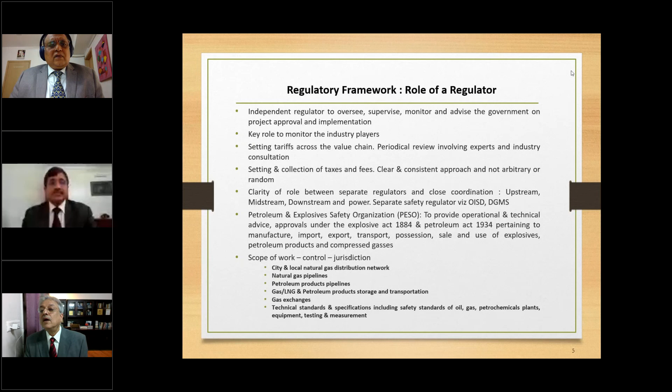I'm not able to move ahead on my slide. Shall I open the presentation, sir? Sir, can you just click on the presentation? Okay, click on the presentation, I think maybe, sir. I think, yeah, okay, sorry, that was my mistake.

So let's talk about the upstream policies and regulations in the SAARC region. All the countries in this region have experienced that the hydrocarbon resources are less, not really abundant. Also, whatever production levels were there, they started declining over a period of time, and new areas for exploration were looked at and made available. But those areas were very challenging geologically as well as technically difficult. So this required new technologies. There were also mounting subsidies, heavy import bills on more imports. All that meant that there has to be a relook at the policies.

In the countries there was slight difference in the legislation and also some of the conditions in terms of cost recovery, profit petroleum, revenue sharing, price benchmarks. There's a slight variation on that. For example, India shifted from the initial stage of giving blocks for exploration and production on nomination basis to bidding of the blocks.

Then came the New Exploration Licensing Policy, which was more competitive and opened up for other private players, and also players from foreign countries. And now we have shifted to an Open Acreage Licensing Policy, which is real-time exploration. Any company, without any periodic bidding, can come up any time of the calendar year and seek permission to explore in a particular area.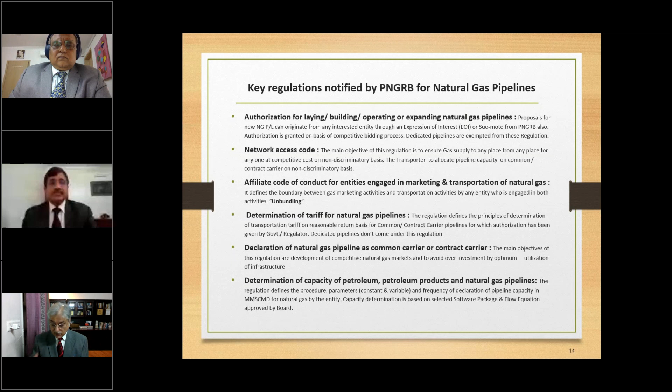One interesting case study, I thought, is how a proactive regulator can really make an impact on the growth of the sector. City gas distribution: India has gone up to 10 rounds of city gas distribution, for different geographical areas where gas has a demand. Those areas are made into a compact area packet, which is known as geographical areas. We have gone through 10 bidding rounds, and we are all set for the 11th round now.